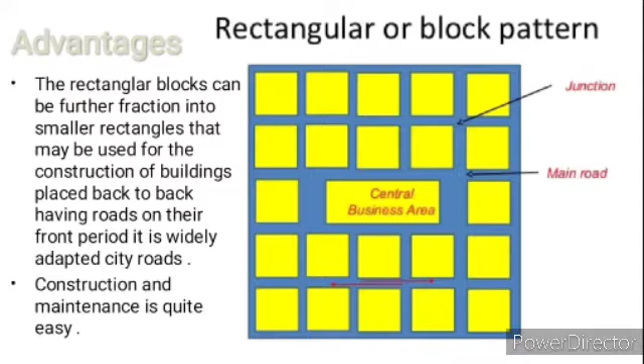Construction and maintenance is said to be easy. Disadvantages: it is not convenient because roads are perpendicular to each other. This increases the rate of accidents due to poor visibility at a perpendicular junction.

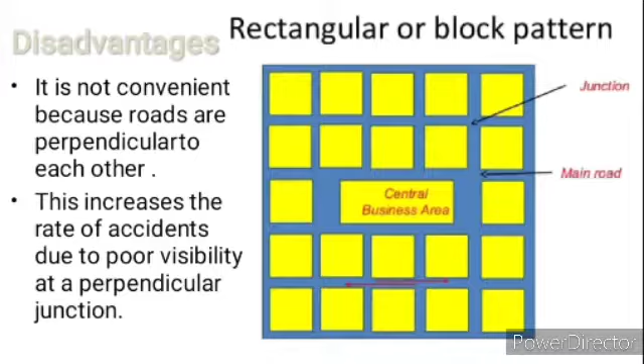Next pattern is radial or star and block pattern. It is a combination of star and block pattern. The entire area is divided into a radial network of roads radiating from the center outwardly, with a block pattern network of roads in between the radial main streets.

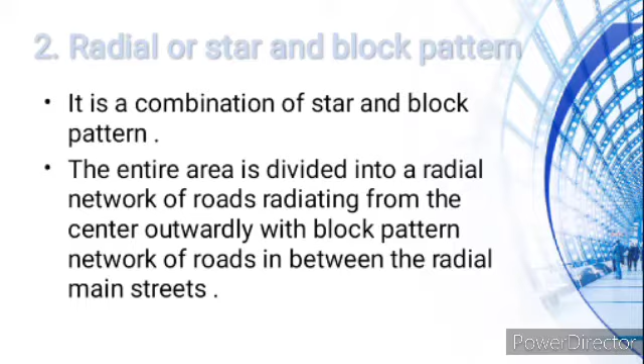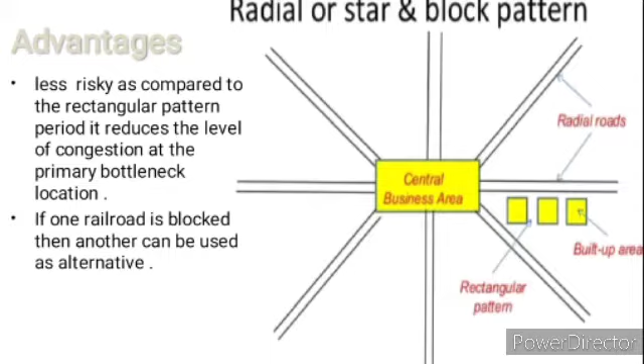That's how it looks. Advantages: less risky compared to the rectangular pattern. It reduces the level of congestion at the primary bottleneck location. If one road is blocked, then another can be used as an alternative.

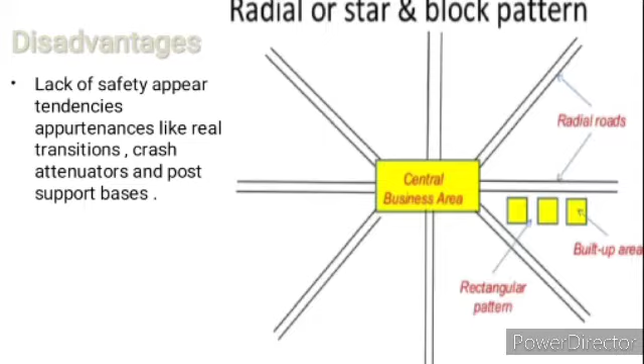Disadvantages: lack of safety appurtenances like rail transitions, crash attenuators, and post support bases. It is only effective when two-lane ramp traffic does not have to merge at the downstream end of the ramp.

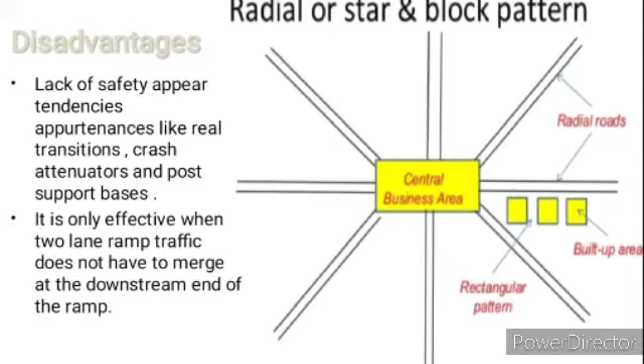Radial or star and circular pattern. It is a pattern in which the main road, radial roads, radiates from the central point and are connected with concentric roads or ring roads that are also radiating outwardly.

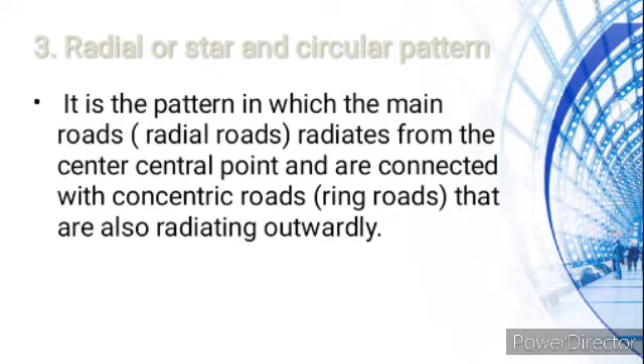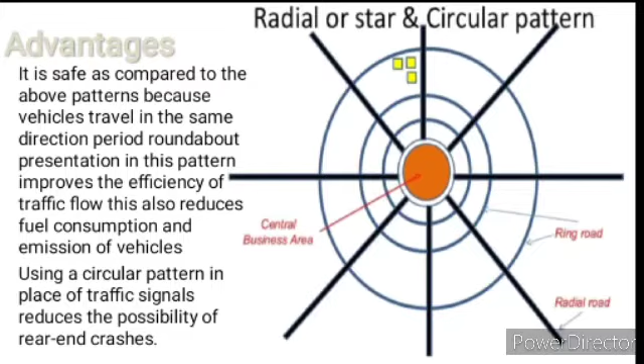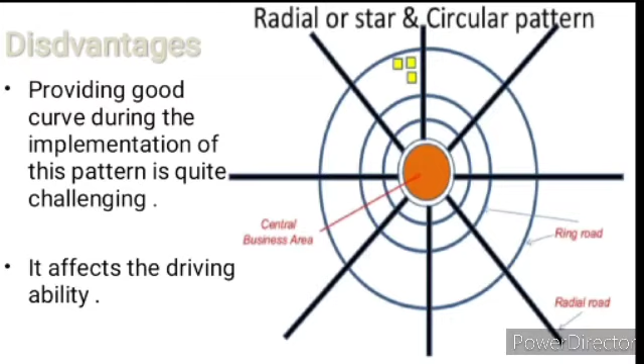Disadvantages: providing a good curve during the implementation of this pattern is quite challenging. It affects the driving ability.

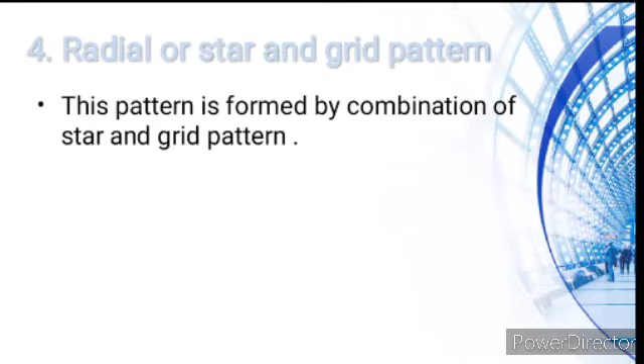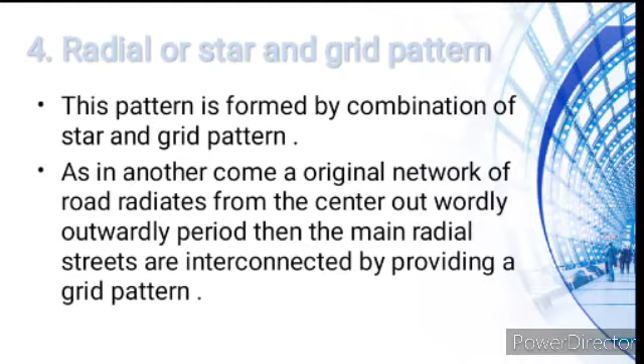Next is radial or star and grid pattern. This pattern is formed by a combination of star and grid pattern. A radial network of roads radiates from the center outwardly, and the main radial streets are interconnected by providing a grid pattern.

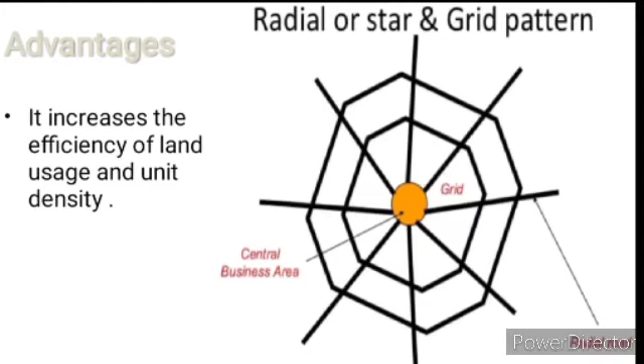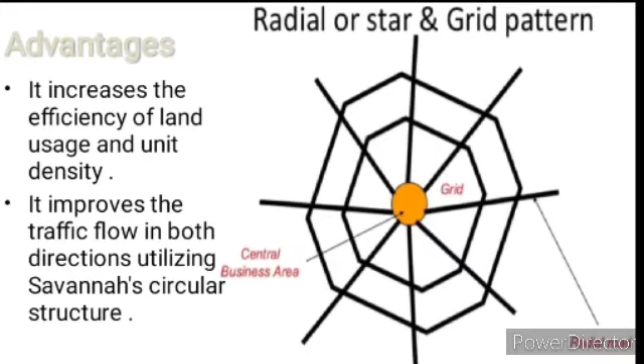That's how it looks. Advantages: it increases the efficiency of land usage and unit density. It improves the traffic flow in both directions utilizing a circular structure. It provides high safety to vehicle traffic with a high proportion of three-way intersections. It reduces the cut-through traffic.

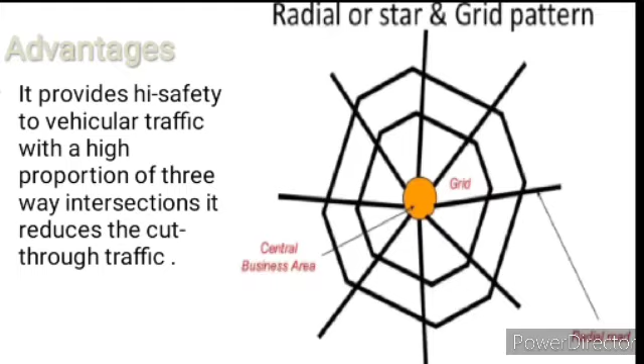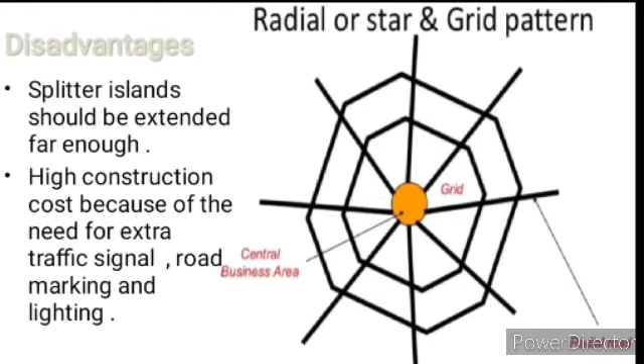Another is the hexagonal pattern. In this, the entire area is divided into hexagonal patterns. Three roads meet the build-up area boundary by the sides of the hexagons at every corner of the hexagons, which can be further divided into suitable sizes.

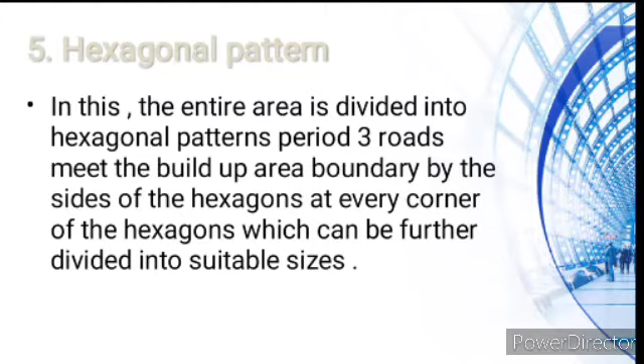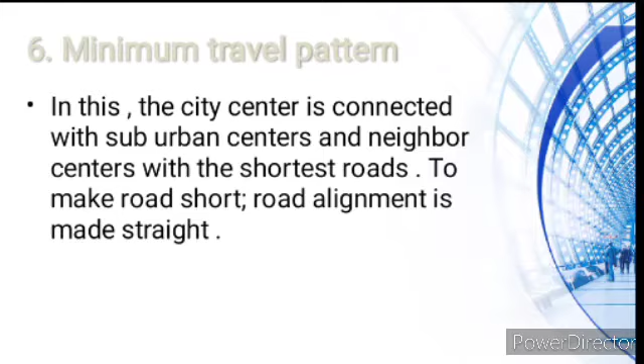The main principle of this road pattern is to reduce the time and distance that a vehicle takes to reach the destination. It also focuses on the interconnection of branch roads. It increases the response time of normal vehicles as well as emergency vehicles like ambulances, fire engines, etc. to reach the destination.

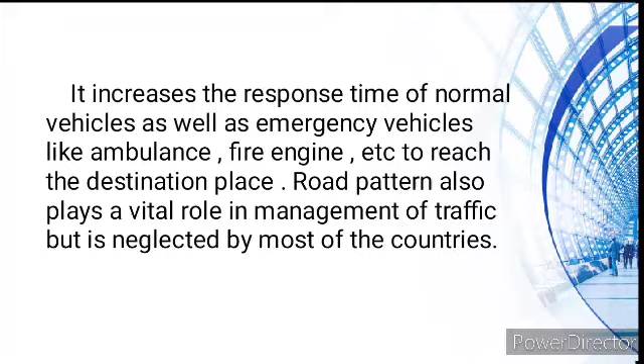Road pattern also plays a vital role in traffic management but is neglected by most countries. So those are the road patterns. The question is, are there any manifestations that they are being used in highway development here in the Philippines or here in Marinduque?